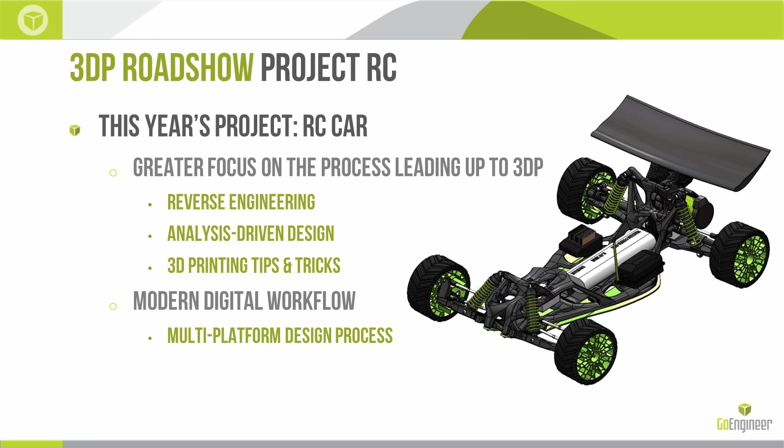All right, so here's the scenario for Project RC. GoEngineer is pivoting, and we are going to enter the RC market. This is the scenario here. We want to create aftermarket parts for existing RC car chassis. So I know at least one of you recognize that as being a Traxxas.

Anybody else here into RC cars? Yeah, I'm not either. I wasn't until I started this project. I was like, this is actually really cool. And I go to the hobby shop and they have indoor tracks and it's awesome. And I start thinking, oh man, I could really get into this. And then I remember that my wife already thinks I'm a child. And so if I start showing up with these at home, it's probably not going to go over very well.

One of the things that we want to do with our products is we want to make sure that they are all designed efficiently and smartly, and they're all optimized. There's a lot of thought behind our designs. We want them to look good, but we also want to be able to prove that we've put a lot of time and analysis and effort into creating quality parts. And so everything that we design is going to be based on this analysis-driven optimization, which is something we're going to talk about.

The initial product line is going to be low volume and customizable, so it's a perfect scenario for 3D printing. 3D printing is its most efficient at one single part, right? And as we start to scale up, 3D printing starts to lose its efficiency. So at least as initial release, what we wanted to do was create a car like this that we could bring into a focus group or put in front of prospective customers and say, this is what we're capable of doing. This is how we design this. This is the thought process that goes into our parts.

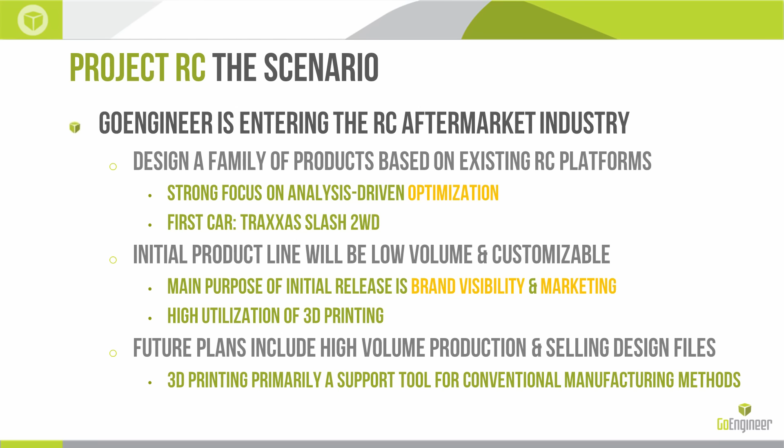When I'm printing parts, I have to ask myself, what's the end goal of the print? Is it going to be a prototype? Is it a prototype of a part that I'm eventually going to injection mold, or eventually going to cast? Then I have to design for the cast version or the injection molded version, right? But if the end goal is a 3D printed part, then I can design for 3D printing. And the design for manufacture rules for 3D printing are a lot different than the design for manufacture rules for injection molding. Does that make sense?

So the car that we based it off was a Traxxas Slash. We based it off Traxxas because basically they're the leader in RC cars as far as my little bit of research found. And so we wanted to pick somebody that already had an established market that we could poach. We could build our aftermarket parts on this.

It felt really nice to go into the hobby shop and say, what's your most popular car? I'm going to buy it. And they said, what's your price range? And I said, I'm not paying for it, so what's your most popular car? And the thing ended up costing about $400. And I didn't even have to get that one. The $400 one had upgraded motors and stuff like that. It isn't even important, but I have to buy the best, right?

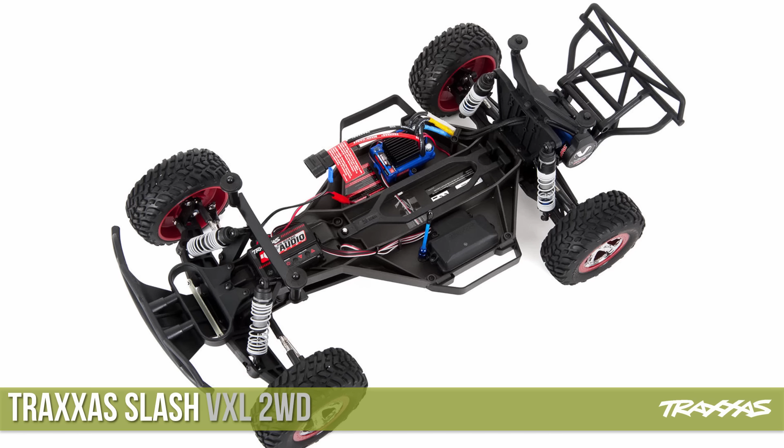Here it is underneath the shell. And this is what we're going to be reverse engineering and building our aftermarket parts for. All right, so it's actually a really good design, and it's optimized for injection molding. And you can see the chassis of the car that we purchased here.

So what's the workflow going to look like? We're first going to reverse engineer this existing platform. You guys are probably going to start to have some questions at this point because you don't really know the end goal, you don't know the process. So if you do have questions, you can ask them. We're going to reverse engineer the existing platform. The whole idea of reverse engineering is we just need to create a digital model of something that is already three-dimensional reality, a digital model that we can use as a guide to design new parts off.

Once we have those parts digitized and we can start doing our own designs, we need to go to our analysis-driven design step. And you'll see how this works. And to be honest, this is going to be my favorite part to talk about. And I'm guessing that there's nobody in this room that has ever done this analysis-driven design before, the way we're showing it. It's really nice to be presenting to a group of people and knowing that I have something that probably nobody in here has seen before. There's going to be something new for everybody in this room, I promise.

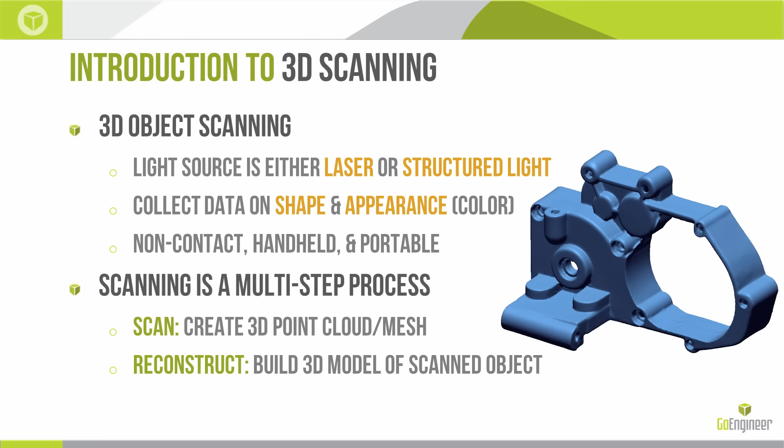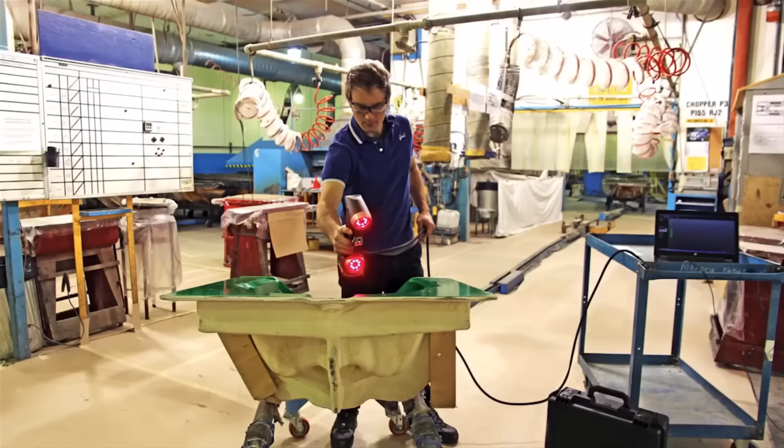So you scan it and that will create a mesh, and then normally you're going to be reconstructing the model. So here's an image of our scan. I normally just wouldn't print or manufacture that directly. Normally what I would do is use the scan and use the software to recreate a parametric CAD file off that. So you can see it does have targets or stickers on the model. That's how these scanners register.

How are the stickers picked, the location picked? Is that arbitrary? It's arbitrary. They say about every 4 inches or so.

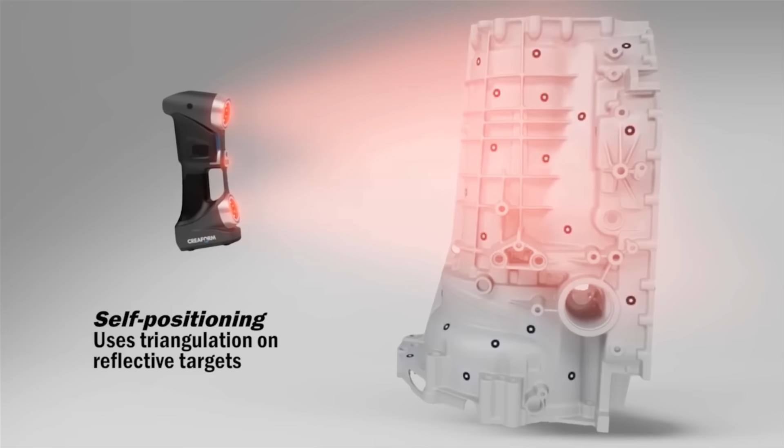So you can see in real time how quickly he's collecting that data. At any point, he can pause that for whatever reason and continue on later. Because he has those targets, he could actually move that transmission housing at any point as well. So he could actually hold it, if he's strong enough, in his hand, move it, and do the outside and the inside of that casing all in one scan. I'll let Cameron answer that after the video.

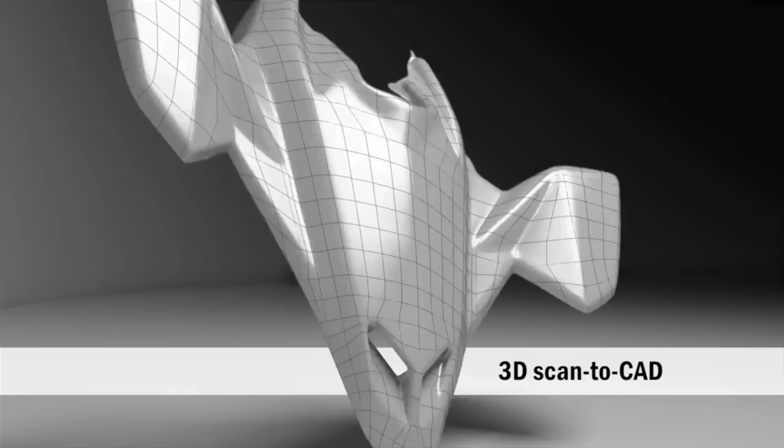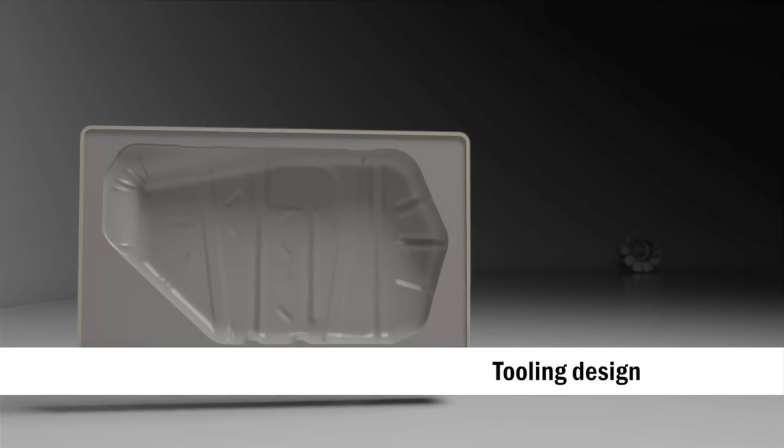Does it stitch? So if you go over an area and you inadvertently, because of the angle that you moved it, left the patch out, and you do a repass, does it know just to patch that area that it missed? It will continue collecting data over the stuff that it's already collected. But yeah, if you are scanning and you pause it and you start maneuvering the model and you see areas that you missed, you can start it right back up and continue scanning and hit those spots that you missed. You don't have to rescan it and then mesh those later. Does that answer your question?

All right, so there's a few different 3D scanning workflows. Scan to print is the most basic. This is where you might scan a part and then manufacture that or print it as is. So this is used pretty often for things like artifacts. We've done dinosaur bones, handcrafted models that don't have any digital files that exist.

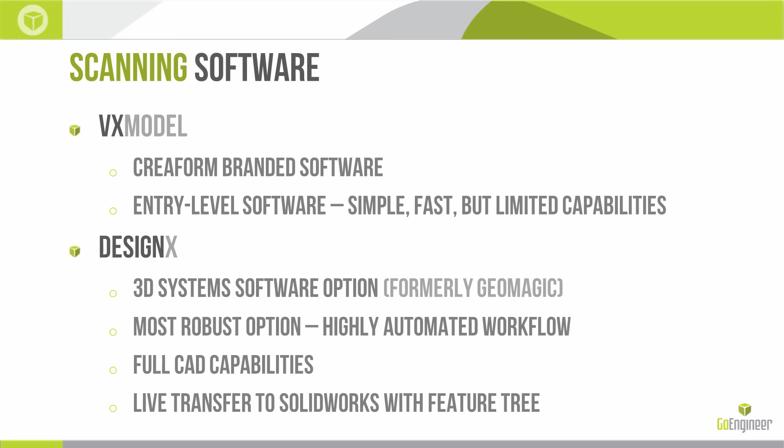We do offer two types of software. I wanted to just quickly discuss this. We have a VXmodel software, which is more entry level. It's Creaform branded. And then we have a software called Design X, which is what I use. It's the higher end software. It's a little bit more robust, probably a lot more robust, pretty automated workflow. It does have full CAD capabilities, so it is a full CAD tool.

I didn't really use it that way because I'm well versed in SOLIDWORKS, and it doesn't have the same capabilities as SOLIDWORKS does. And for that reason, it has a live transfer to SOLIDWORKS and a lot of other CAD tools as well. So you start to build some basic shapes in Design X, and then you hit transfer, and it will transfer over to Inventor or SOLIDWORKS or Creo, I think, Pro E, and it will build a feature tree for you that's editable.

So are you actually using these meshes as a template to draw over the top of these things? Yep, exactly. And you'll see a screenshot later on, but that's exactly what I'm doing. So I have a template, and you'll see how I'm actually using them. So there's no scanner software to create vector. Usually it's always a mesh. These softwares always turn these scans into a mesh.

It's a mesh. Within Design X, there is like an auto surfacing tool where it will auto surface that mesh, but for my purposes, it wasn't what I wanted. But for some other purposes, it could be exactly what you wanted. Yeah, because it wasn't accurate enough? Yeah, I wanted very prismatic shapes in very definite shapes that are tightly controlled. Whereas when you do the auto surface, there's not a lot of control over it.

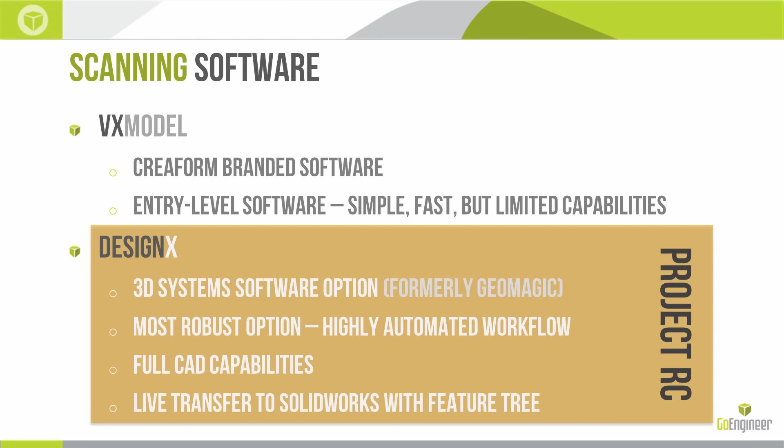Do you agree with that, David? Yeah, normally auto surfacing is usually for very organic shapes that you couldn't draw otherwise. Unlike this comment about the prismatic, he wanted to have features in the tree that you could edit. Yeah. I wanted flat surfaces that are straight and square and whatnot.

All right, so let's get into the process here. As we're going through this process of recreating this chassis, I want you guys to notice in the bottom right-hand corner, I have a little logo, and that logo is a signal as to what piece of software I was actually using. So this is the Design X logo, and you'll see SOLIDWORKS, you'll see Stratasys, you'll see Inspire as well.

So to reverse engineer this chassis, which is the first part that we wanted to do, instead of putting stickers on the chassis and doing one single scan, we actually put this on a little turntable that we have, and that turntable has the stickers on it. So we didn't have to put any stickers on this. And we scan it, and then because it is on the turntable, you have to do multiple scans.

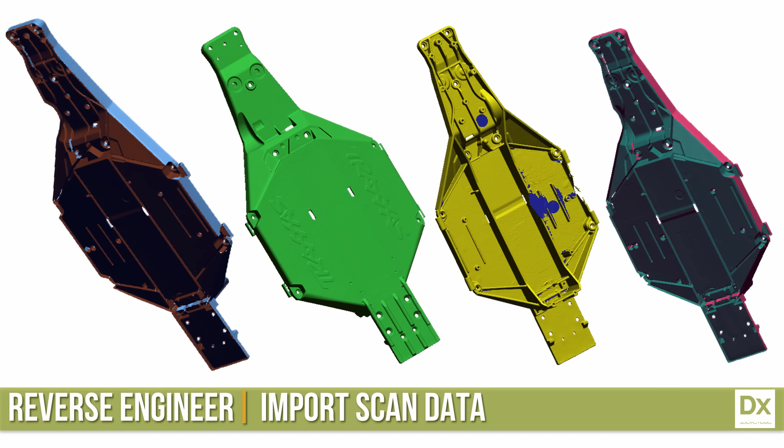So you scan as much as you can, you stop it, you flip it, you scan it again, you stop it, and you end up with, in this case, 4 different files. So these are 4 different scans. They all have a little bit different data based on how the part was oriented.

We combine those scans using the DesignX software. We realign them into a single scan, and then we remesh it globally. This process takes about 3 to 4 minutes. It's pretty easy. It basically says, here's your scans. Which two do you want to move? Pick corresponding points on each one. And it does like a coarse align, and then it does an automated, more accurate align, and then it just remeshes it all as one.

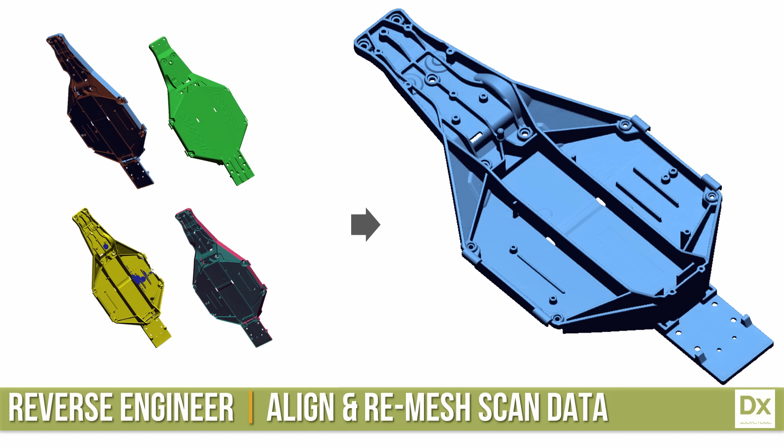And so actually what happens is you get a result that's basically a combination of 4 scans. And it's probably hard for you guys to see in the back here, but this scan is so accurate that you can start to see some of the sticker data on this. So this is a sticker that's raised just slightly. You can actually see it up on the bottom of there. So it's a quite accurate model.

We ended up doing this for every single part in the car. So this particular chassis has a few parts that are already bolted together. We scanned every part individually because we felt like it gave us more flexibility in what we wanted to do. Like if I only wanted to recreate the shock tower, I could do that if I had it as a separate file. So we scanned them all individually. All of these 7 parts are actually what I call the chassis.

So the chassis has all of the mounting points. So you have like control arm mounting points here, shock tower mounting points here. You have steering servos and steering bosses here, front bumper and front control arms, front shock towers. All of those mounting points, that's what I'm after. Because I know later on that I wanted to create something like this. I wanted to create a single part chassis. Okay? Are you guys following along?

You're confusing me with the term sticker. Like these guys here. You peel it off and put it on your part. Those are all known things. The scanner knows what they are, so it knows how to treat those. Yeah. The turntable you said had the stickers.

Yes. Is there any relationship between the turntable and the part? If you're doing the other parts, or you're doing multiple scans of your base chassis, that doesn't have to be aligned again. You just set it down on it. Correct. So it's totally independent of each other.

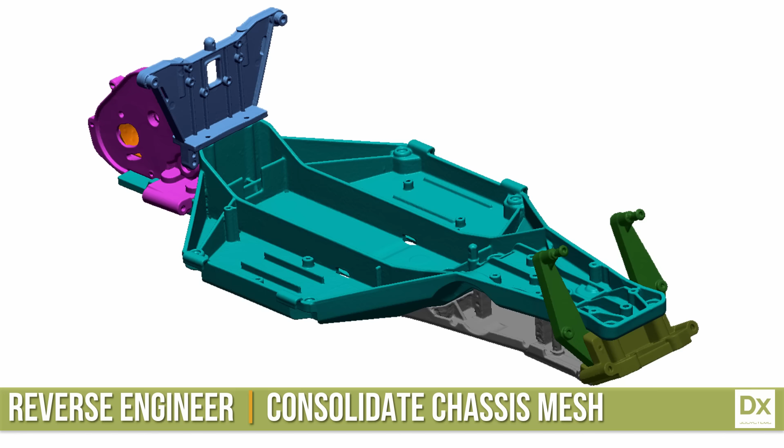Are the stickers dumb? I mean, they're just a reflection point from the tool, so they're not any particular identifier in the sticker itself. Correct. It's just a relationship to the other stickers. They have to be this particular sticker so that when the camera sees it on the scanner, it knows that it's looking at a sticker. But other than that, that's it.

Okay. So I took all of those scans and I aligned them within the DesignX software, and then I started rebuilding some geometry. All right, so these are the points that I started rebuilding. Notice I didn't rebuild the whole car. All I wanted was the mounting points, because this is what I'm going to feed into the next step, which is the SolidThinking Inspire software, the topology optimization software. All right, so all I needed was all of these critical points here.

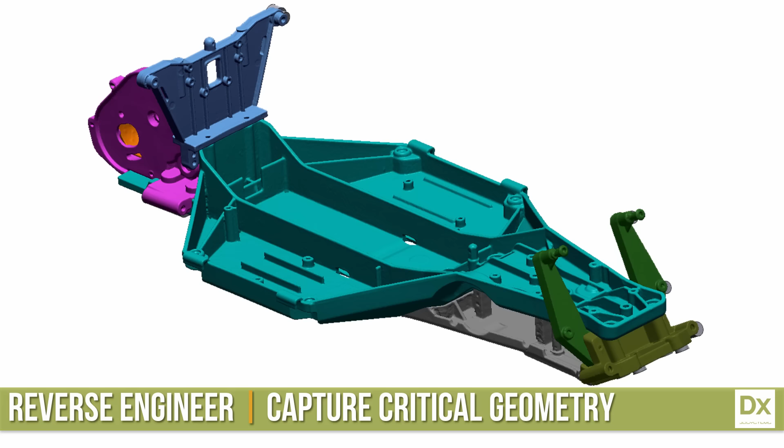I could rebuild entire parts, and I did that on some cases, but in this particular case, just the mounting points. And that gets us past the reverse engineering stage and into the design and analysis stage. So let's quickly show you guys a quick video here.

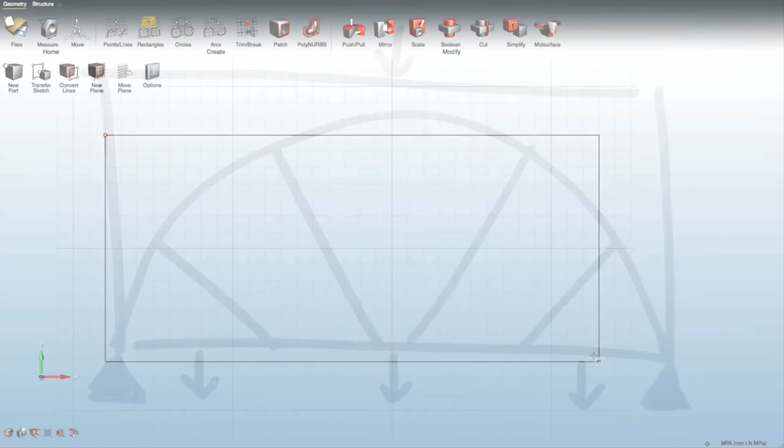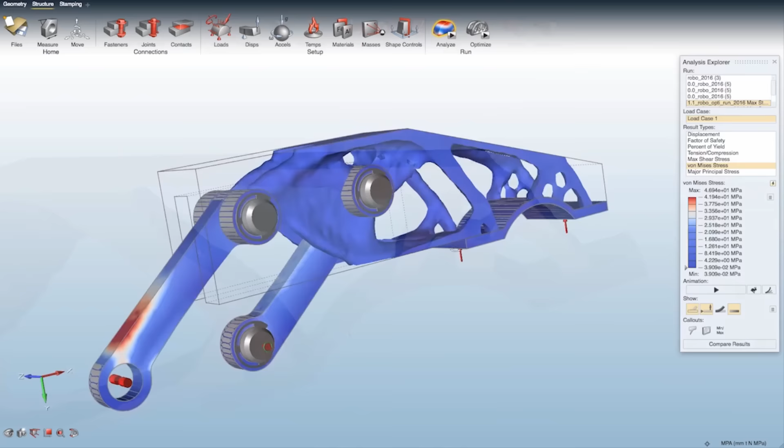Where do your designs begin? Do you use previous projects as a starting point? Can they be based on hard-earned knowledge, or is it something else? When faced with a straightforward problem, like a beam carrying a single load, creating an efficient structure is something that can be done with, let's call it our engineering intuition. Or the same arrangement can be drawn here with all the simplicity of a sketch, and optimization algorithms generate basically the same elegant solution. But what if we tackle something more complex, like an assembly with multiple loads applied in 3 dimensions? For most, engineering intuition is not enough anymore, and conventional simulation tools won't help. SolidThinking Inspire changes the way design engineers approach design by generating forms based on a set of loading conditions. The results can be validated and compared using native analysis tools. Final models can be easily exported to your preferred CAD tool for finishing, or you can use the cutting-edge PolyNURBS toolset to prepare the model for additive manufacturing. Inspire can help every design engineer quickly create dramatically lighter structures and better understand the effects of material placement in whatever they're developing. New users need, at most, a few hours of training, and many require none at all. SolidThinking Inspire. Lighter, stronger parts without the learning curve.

So who's already sold on that? Right? That's pretty neat, don't you think? The last part that they talked about, it being a very accessible piece of software to get your hands on and start using, is absolutely true. So this project is the very first time that I've ever used Inspire. It's actually also the first time I used DesignX. So DesignX has a little bit steeper learning curve.

SolidThinking, very approachable. SolidThinking, it's a NURBS and Morphogenesis CAD software. So the Morphogenesis part is the optimization part. The video didn't show it very well, but we'll beat it to death later on. But basically, again, it creates this design envelope with critical surfaces. You impart loads on those surfaces, and then it does an FEA analysis and iteratively whittles down to the shape that you want. They call it morphogenesis.

Does anybody know what morphogenesis means? Where that term comes from? It's a medical term. It basically means bone growth. And so you can see that this software has been around for a long time. It was originally created by a research group looking to study how bones react to forces and how they might change shape based on external loads, and how they grow in response to external loads. And those algorithms that they developed were basically turned into mechanical CAD software because they thought, hey, we might be able to create optimal designs out of that.

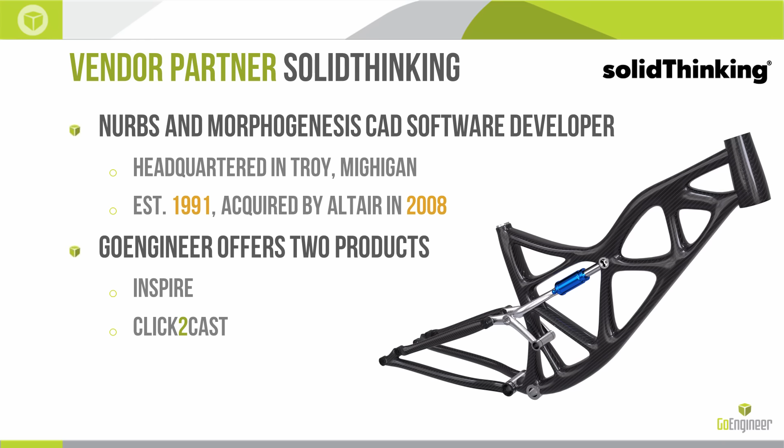So I can say, have free rein and give me an organic freeform shape, or I can say, give me a shape that has just straight zero draft, more like an extrusion, something I might want to machine. Or give me a result that has draft in a single direction, or give me a result that has draft in 2 directions. All right, so even if I'm not going to be 3D printing this, if I know I want to machine a bracket, I can tell it only give me results that might be machinable.

So a quick intro into what topology optimization is. I like to call it true design for additive manufacturing, because the most optimal results are typically impossible or difficult or not cost effective to create. The engineers define the boundary information and not the shape. So this is a fundamental difference in going back to our bracket, how we might approach the design.

In the old style, the engineer defines the boundary conditions and then creates an initial shape and starts doing some detailed drawings, does some FEA analysis, changes the results based on that. With this, all the engineer initially does is create the boundary conditions, set up an FEA study. The software then tells him, here's an optimal shape that you should go with.

And then it's the engineer's responsibility to take the information that the software tells it. All the software is doing is saying, here's the shape that you want. These are your load paths. You absolutely need material in these spots. You can add more material other places. And I don't care how you put the material there. I don't care if it's machined or cast or welded or 3D printed. Just put material here. Does that make sense? So it eliminates that first pass, that first guess.

Types of inputs that they're going to use are support faces, forces, pressures, RPMs, accelerations, both straight and circular accelerations, thermal loads as well. And really just keep in mind that the software is outputting the load path. So it's showing you, based on the resultant forces from all those load cases that you did, this is the result. These are the forces. These are the paths for the forces.

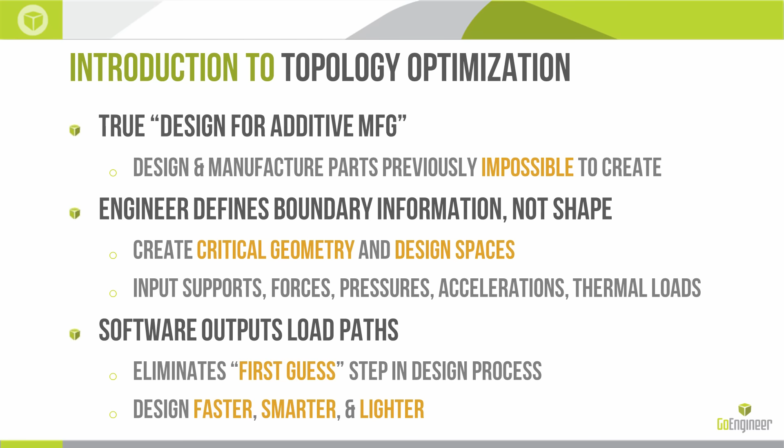Notice I use the word load case. That's pretty important. It allows you to set up, like in the example of our car, we did an acceleration load case, we did a decelerating load case, and we did a sharp turning load case. So all of those load cases have different forces, different accelerations, different pressures, stuff like that. It solves all three of them at the same time and gives you a result that's optimized for all three of the conditions. Okay.

Some of the characteristics that we can optimize for: max stiffness. We can target a particular mass if we need to hit a certain poundage. We can optimize around resonant frequencies, and we can optimize for wall thickness as well. And then keep in mind the shape controls that we have. You can go organic, you can do extrusion, or you can do the drafted ones. I know I mentioned that I looked at a lot of different pieces of software. This is one of the key reasons why I chose the Inspire software, because the other tools didn't have these shape controls.

And most people aren't printing end-use production parts right now, right? Everybody wants to. We're not quite there yet. We're still using prototypes. Prototypes are the main application for 3D printing, and then we go on to injection molding, we go on to machined parts. And if you don't have these shape controls, then all of these steps are kind of superfluous because it's giving you a result that you're not going to create out of 3D printing, right? So shape controls are super important.

All right, so now we're inside the Inspire software. What you're looking at, the gray areas came from the DesignX software. So from DesignX, I just output a Parasolid file and brought it into, in this case, SOLIDWORKS, and I created my design envelope inside SOLIDWORKS, which is the maroon color. So that's my bounding box. This is a piece of information that I have to feed it.

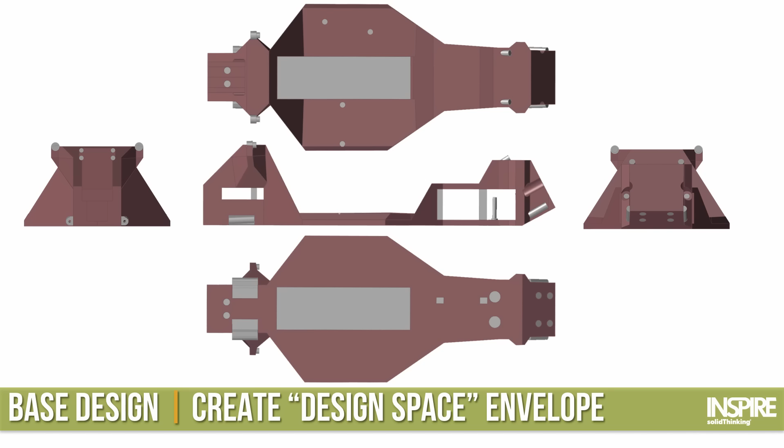This is probably more complex than it needs to be. In general, Inspire wants a very basic bounding box. It wants a lot of freedom, because I kind of built in some weaknesses within this, like not having any material right here created an inherent weakness in it, where if I had material within my bounding box, I'm sure it would have bridged that gap.

Some of the load cases I did, so acceleration, you can see some of the forces I input. There's an acceleration down here going this way. You have remote loads for where the wheels make contact, and remote loads for where the end links actually link up to the chassis. I will say these load cases will probably not hold up to a lot of scrutiny.

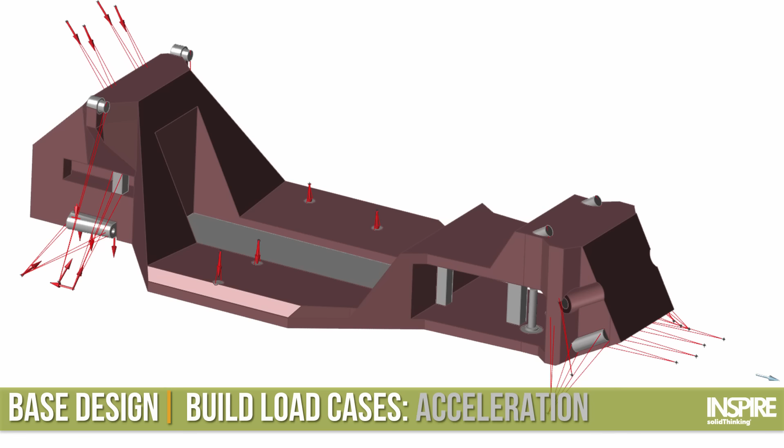So if you get these, you guys already have these slides. If you start looking at these and say, this doesn't quite make sense, it probably doesn't. But it brings up a good topic. The results that you get out of Inspire are only as good as the information that you feed it, right? Same with any standard FEA analysis. If you set up your analysis incomplete or incorrectly, you're going to get an incomplete or incorrect result. Same thing for Inspire. So definitely put a lot of work into making sure that your load cases are accurate.

We did a hard braking or decelerating. You can see a lot of forces on the front shocks or front wheels, a deceleration. One of the cool things, if you don't know the exact values, if you are optimizing for the max stiffness or the max rigidity, you only have to have relative values on your forces.

So in reality, what I did was, since I didn't have hard numbers, I sort of just guessed and said, okay, when it's decelerating, I might have a force of 1 pound on the rear wheels, but 5 pounds on the front wheels. The 1 and 5 aren't really accurate, but what I was going for is a force that's 5 times higher than the one on the rear, okay? And it's still going to give me the result that I want if I'm optimizing for max rigidity.

If I was targeting a mass, or if I was going around resonant frequencies, or if I really wanted good information out of my factor of safety plot or my displacement plot or stress plot, then I would have to have more accurate values. Does that make sense? Everybody following me? I probably shouldn't admit I did that, but I think it's a key thing to understand.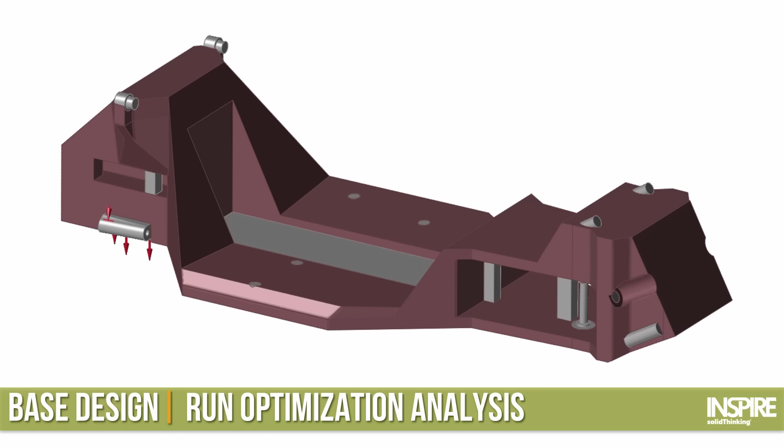And so you start to see the material whittle away. And what I'm looking for as I move the slider is, at what point do I see the minimum amount of information that I need to go on to the next step? So it's sort of up to my interpretation. Somewhere in the middle there, I saw enough load paths that I could say, okay, I have enough to actually design off of, okay?

And that's where I started using that PolyNURBS tool. So you guys got a kick out of that. When it started within that video, creating those swoopy shapes along the load paths, did you guys notice that? That's called direct editing, the push, pull. You can grab faces, edges, points, pull them, shrink them, expand them, add more for more control, delete them to make it more swoopy. That's built into Inspire, and it's awesome.

I've always been a mechanical CAD guy, so I haven't done a lot of this type of modeling, but I've seen it, and I've always wished that SOLIDWORKS would implement it. Now I finally have this tool. Because if I wanted to draw this shape in SOLIDWORKS, or Inventor, or CATIA, or Pro E, kill me, because it would be horrible, right? It's a different type of modeling.

And it took some getting used to, but, you know, again, this was my first project, and it came out pretty well. You've used Inspire. Do you have the PolyNURBS tool? It just came out in 2016. I haven't seen that. You wish it had it, right? Have you updated to 2016? No, I just used the trial. Oh, got it. But I got a lot done in the trial. Yeah, that's the way to do it. I'm pretty sure anybody can go on the website and get a trial.

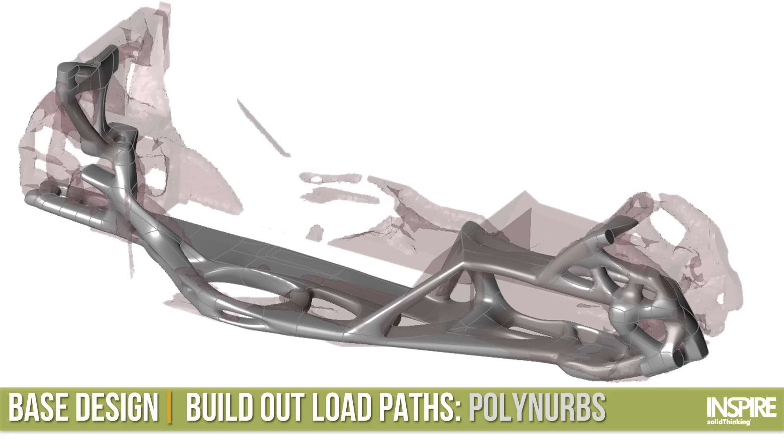This PolyNURBS tool is awesome. So what I did was, within Inspire, I drew half of it, okay? And then I brought it over into SOLIDWORKS, and I mirrored it. I combined those, and I started doing all my detail work in SOLIDWORKS, okay? So I needed to make this manufacturable. You know, I put these tapered holes in there to use these little brass threaded inserts. You guys notice those on the printed parts? It's a great way to get threads into a printed part. I added a few details, little artistic freedom there. But this is the end result.

All right, so the idea here is that when I drew this, I probably had a particular material in mind. I would know the strengths of those materials. I can also put that material in Inspire. And if I do the exact same studies, but one I set the material as like titanium, or one I set it up as, say, nylon, those load paths are going to be the exact same. They'll just be different diameters. Does that make sense?

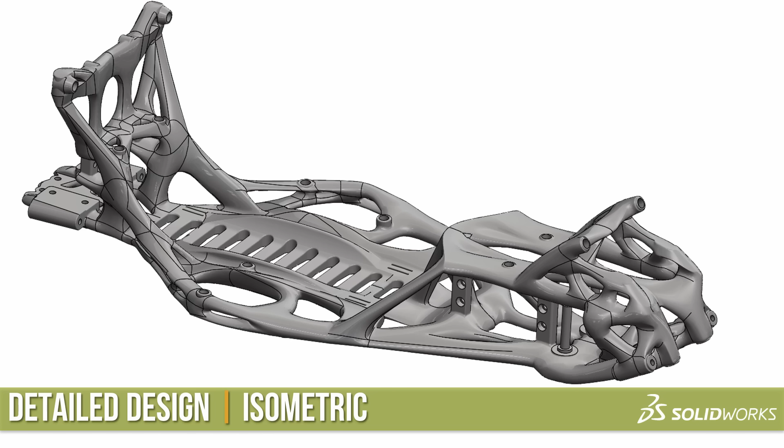How big of a range of materials can you choose from in the software? That is a good question. I noticed a couple dozen, and I'm quite sure that you can input your own, but I'm not 100% certain on that. Would you have to bring the strengths of the materials into the software? If you're creating your own, yeah, you go to like MatWeb and pull up just some basic stats on it, because it's not doing like a non-linear sort of FEA analysis.

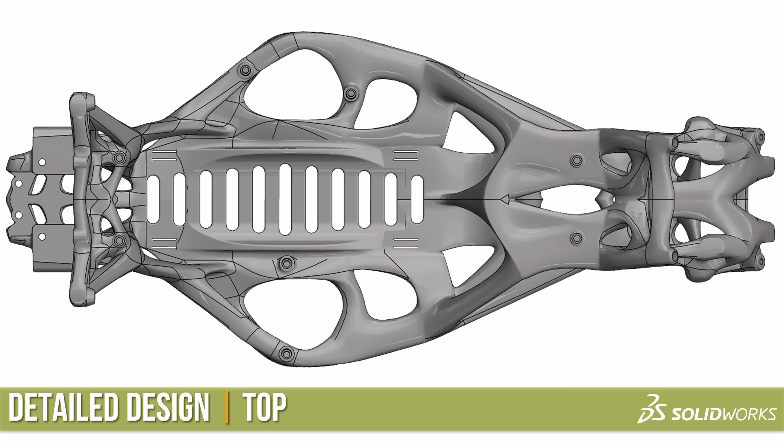This is not specific to any manufacturing process, right? This is not. Right, that's just sort of a general idealized frame. Exactly. Because I knew I was going to be printing this and I wasn't going to do anything beyond that. Because I'm basically using it for brand visibility, for marketing. It's a showpiece, so I'm just going to print it.

You are impressing me with a lot of information. Thank you. I appreciate that.

But if you had in mind, well, we're going to die cast this, would the results be different? The results would have been different because I would have put a shape control on it that was like a double draw shape control. So it's going to be drafted in two directions, whatever I do. And so the result would be different. I will say, because this single part is such a complex part, the results might not be what you want. I will say Inspire is definitely geared towards more simplified parts, I learned, because this is a very complex part.

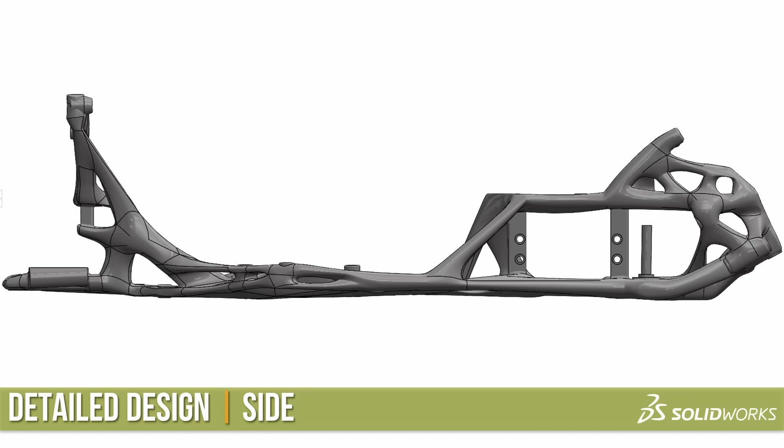We had like 20 different mounting points, all in sorts of weird configurations. That part's going to be hard to manufacture no matter how you're doing it, right? And so what you'll see is the results for some of the other parts that I did, like the control arms and stuff like that, much cleaner results that would be more optimized for something like die casting.

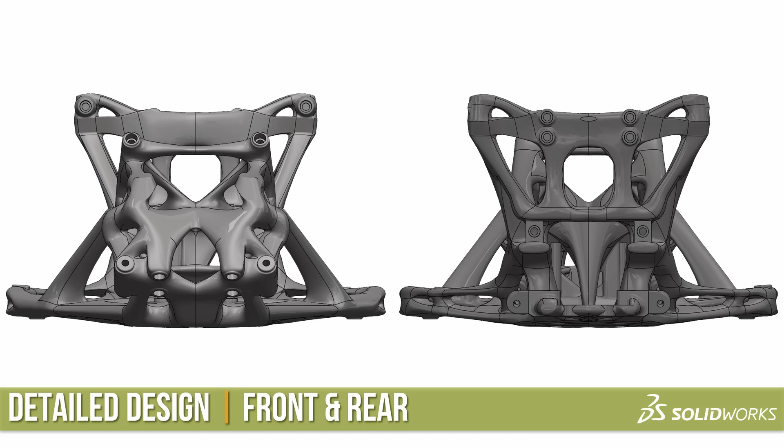Yeah. So if you choose, say, the double draw for injection molding, does this also include a simple mold flow analysis on it? It doesn't. Okay. It doesn't. And that brings up a good point. Now that I've drawn this and I have it in SOLIDWORKS, so it's all parametric modeling stuff, ideally I would set up another FEA study, a second pass FEA study, and verify my results. Okay? That would be the ideal situation. Because that Inspire FEA, it's a good FEA analysis, but it's not as robust as SOLIDWORKS or some of the other tools, and it definitely won't do mold flow or anything like that.

All right, so now it came time to start prototyping this. We use the Stratasys machines. Between all the vendors that we talked about today, I think Stratasys is the one that you guys are most familiar with.

There's your 1989, Tom. I could have got a water bottle out of that. That's cheating. I know, right? He probably stole it from me.

All right, so one thing I did want to mention, because I just learned this fairly recently, is that last year in 2015, amongst all of the commercial 3D printing manufacturers, Stratasys sold over 50% of the machines that were sold globally. So they're the #1 machine manufacturer on the commercial level. And us at GoEngineer, in 2014, we were their #1 reseller. Last year, we got bumped by a reseller on the East Coast, so we were #2

last year globally, but we're still #1 in maintenance renewals, which I'm pretty proud of because it tells you that Stratasys is in a lot of different industries. They work with a lot of different customers using their machines for a lot of different applications, and we're right at the forefront of that.

I'm very lucky to have the job that I do because I get to learn from people like you that come with all different backgrounds. Some of you might be working on assembly plants. Some of you might be creating toys. Some of you guys might be creating jewelry and artistic stuff. And I learned from all of you, so I love it.

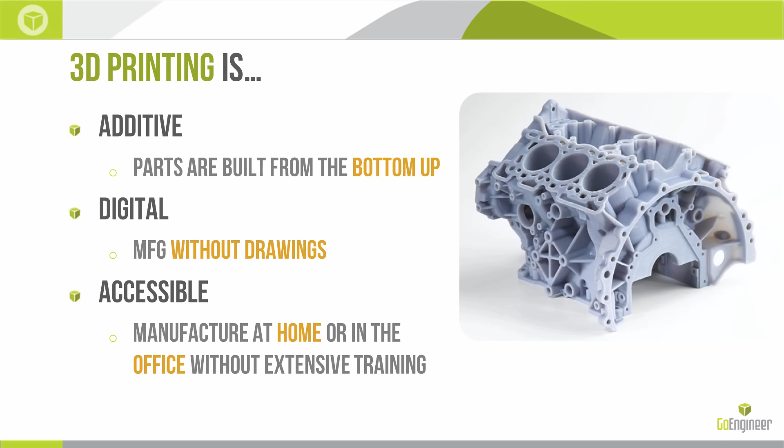At its most basic, 3D printing is an additive manufacturing technology, as opposed to something like machining, which is subtractive. Okay, so in a subtractive situation, you're going to start with a block of material, and you're going to use tools of various shapes and sizes and materials to whittle down into your end shape. And that limits you in the types of parts that you can create. It limits you in the flexibility of your designs because you have to work around setups, work holding, tool accessibility, other typical design for manufacture rules.

Whereas with additive, what's that? Lunch. What's that? You have to work around the break. Oh, yeah. In America, we don't have lunch breaks. Yeah.

No, you do have to work around lunch, and 3D printing is great for that because 3D printing is like a lights out manufacturing tool. You hit the button, it goes, you go do something else. We keep these machines running 24/7. Most CNC machine shops do not do that without a person at the machine, an operator that's in charge of loading the materials, doing their precise setups, unloading the materials, adjusting the feed rate as that machine's going, listening to it. We don't do that.

We hit go. I time it. Personally, I time it where I get in the morning, I unload the night before parts. I hit go. I try to print enough parts to get me to the end of the day. It stops. I unload it. I load up more parts that gets me through the night, and it just goes. And then comes the weekend. I get to do my big parts. I get a 3-day weekend. I get to do the bigger parts that are usually toys and stuff like that. So we keep these going.

There's no drawings. It's all digital. We go straight from the CAD file. And it's super accessible. This is one of the best things about 3D printing, and it's one of the reasons why it's exploded over the past 5 years, is anybody in this room can become a manufacturer with a 3D printer. Everybody. With a little bit of investment in machinery, not really any investment, depending on your machine, into where you're going to put the machine and all of the supplemental equipment that you might need. It's all very minimal. Anybody could be manufacturing parts.

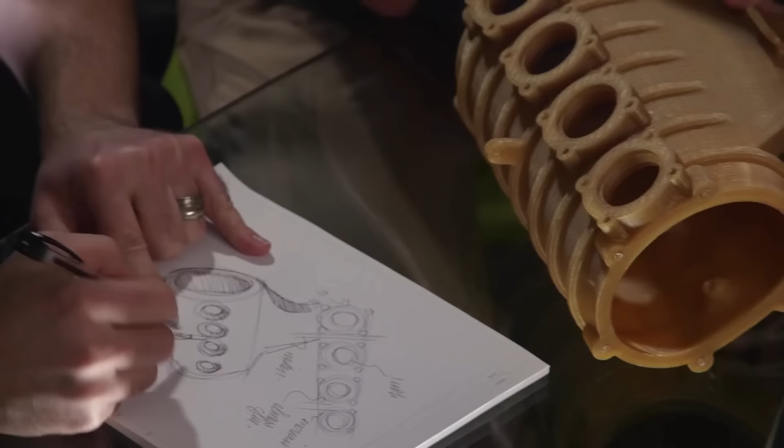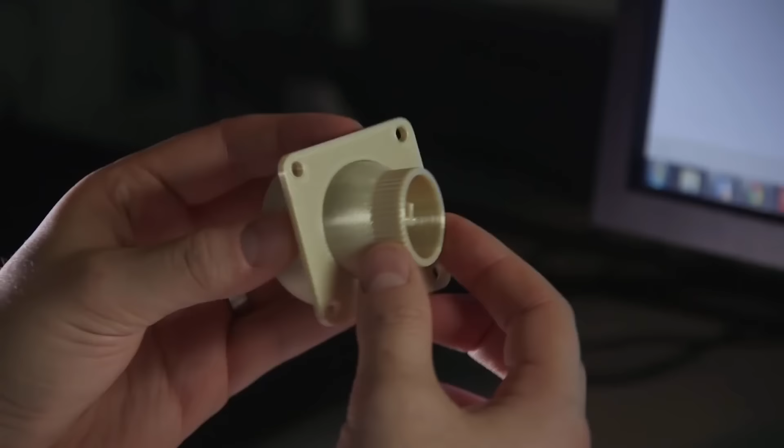With FDM, a designer can sketch an idea and test it the same day. Industries can cut lead times and costs. Products turn out better and get to market faster. FDM parts are helping to build the cars you drive. They're in the airplanes you fly in. They're in the medical devices that save lives. FDM is cutting waste in manufacturing. It's helping engineers power remote villages in Africa. It's helping farmers feed an ever-expanding population. And the ideas keep coming.

Doesn't that video just get you pumped up? He's so excited. It makes me very nervous. He makes you nervous? All right.

No, we spend millions of dollars developing products, and you have a device there that someone can copy my product instantly. That's true. That's true. And that's why we have copyright and patent and intellectual property laws.

Are you saying that the machine that printed the chassis, it was a single filament machine, no support material required? It has a single model filament and a single support filament. You'll see in pictures there is support material. If there wasn't support material, I would have had to probably change my design a little bit.

When they took over MakerBot, did the line that MakerBot was producing change much? Did they sort of blend the two companies, maybe one lower end as opposed to the other, or do they still function quite separately? Quite separately. So Stratasys actually has a few different segments.

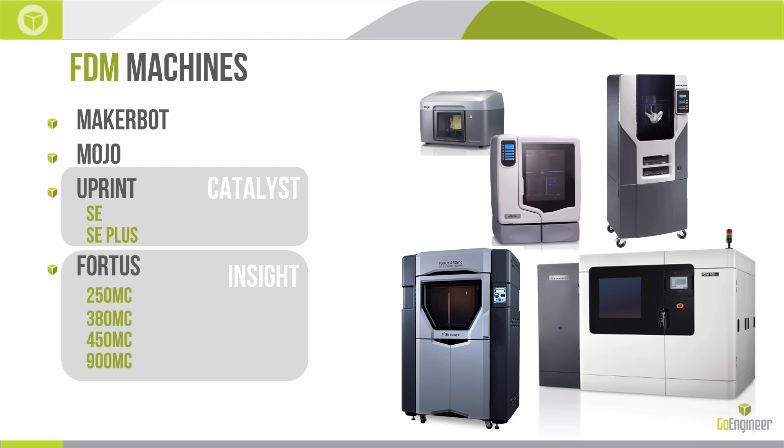Most of the parts that you see on here, I printed on this Fortus 250 or the Fortus 450. I'm not going to go into the details on the machines, but just know that there's pretty much a machine at every price point that you can imagine. So what you're looking at here is a glimpse of inside the printing software.

When I go to print a part on FDM, I have to choose a material and choose something called a slice height, which is the Z layer resolution. I also have to choose an orientation. And with FDM, orientation is probably one of the most important decisions that you have to make. When I printed this, I actually printed it upright on its side like this. Anybody want to guess why I might have chosen that orientation as opposed to like this or like this?

Yeah, so that's a pretty good indicator. So I knew it was weak, like bending like this, right? And so what I wanted to do was I didn't want to impart a force that would cause it to shear along the Z axis. Okay, so with FDM, you essentially have parts with thousands of Z shear layers.

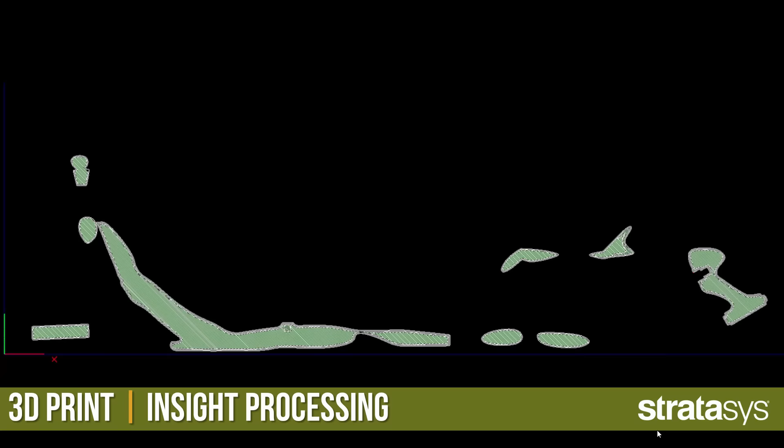How much weaker is the Z axis compared to the X and Y? It depends on the material. It could be as little as 10% to 25%. Nylon is going to be the most isotropic, and then the other ones are pretty much the same. But nylon, for some reason, is a little bit more uniform.

And then any other reasons why I might have done it on its side? Because if I printed it standing like this, I would still get the Z layers that I want. I think it took a little bit longer. Your Z-axis is usually your worst tolerance level. That's true. It would tend to distort those features a little more. That's true. That didn't come to mind in this particular case, but you're absolutely right.

So in Z, because I printed this at 10 thousandths slice height, my Z layer goes in increments of 10 thousandths. Whereas in XY on the machine that I printed on, it's plus or minus 5 thousandths. So it's more accurate in X and Y. Aesthetics was really the reason. It looks better standing up.

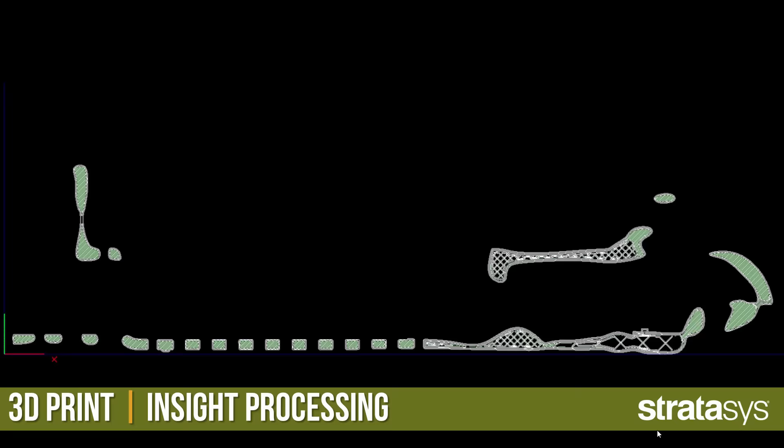So with FDM, because you have these discrete steps, as your walls shallow out, those steps become more pronounced or more visible. So you really want as many vertical walls as possible. And that's why I chose it this way, because I have lots of vertical walls as opposed to flat, where this bottom is very shallowly rounded. Does that make sense? So it just creates a better looking part.

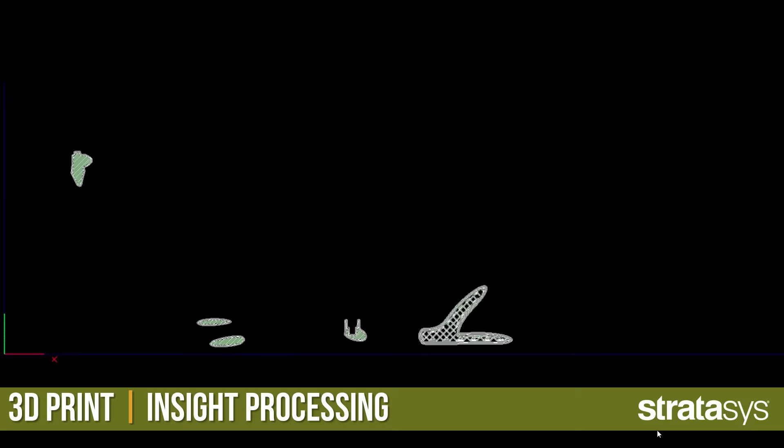See this? How many hours? Oh, that's about an 18-hour build. So, you know, it's 18 hours. I started it one day and I had it the next day.

On the bottom plane, they generally have a heated platform because of, is it temperature distortion of the material? Yep. So all of the Stratasys machines are basically ovens. They're all enclosed, and they're all very tightly temperature controlled. And on the larger machines, they have very tightly controlled airflow as well.

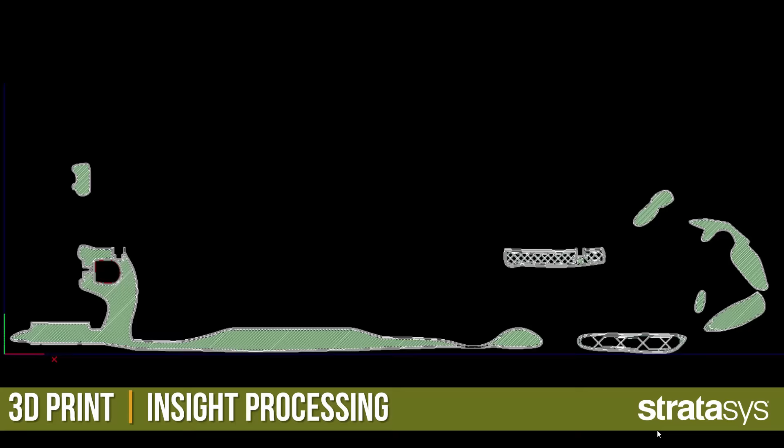Because what you don't want is your part cooling at different rates, because it's going to start to warp and have dimensional issues. So everything's very tightly temperature controlled in these machines. So I was wondering if that came into effect of also standing it up on edge as opposed to the bottom layer. It shouldn't. There shouldn't be a temperature gradient in the different Z layers, because they have fans and air circulating and whatnot.

I didn't have to worry about creating uniform walls because one thing I knew I was going to do is print the interior sparse. So you can see the density of the print actually changes as it goes up. You have a solid, a semi-sparse, and a sparse area. That helps on weight. It also helps on material usage.

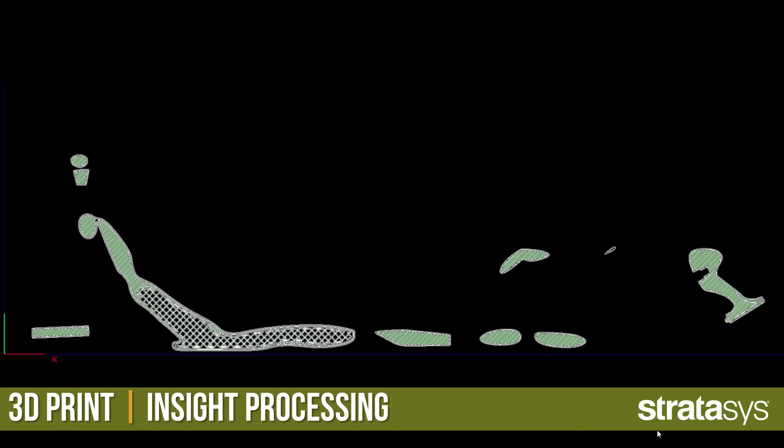What's really neat is if you look at Local Motors, what they're doing with their car bodies is hollowing them out now to meet crash tests. Because otherwise, with the first ones they printed, you slam it in the wall and it'll be like a '57 Chevy. It's not going to move. Really? So now they're making crumple zones within the structure, just like we're showing here. That's very cool.

Yeah, so this is just a click. This is drawn solid in the model, and it's just one click. I don't have a lot of control over the interior shape, but there have been prints where I've actually modeled a surface and done interior portions as well. And that's probably what they're doing, where it's a more structured interior.

Totally possible. Here's another screenshot from that software, and this is the support material you were asking about, all the gray. This is the software within a uPrint or a Fortus? Yeah. This is called Insight, because I use the Fortus machines. The uPrint uses Catalyst. And Catalyst doesn't have as many options as Insight does. For this particular part, I didn't do anything special, but in a later part, I needed Insight to do some of the stuff.

Yeah, you can do like hexagonal patterns. You can do some other stuff. I wanted to show this because here it is standing upright. 3D printing, I've told you it allows you to print pretty much every shape that you could imagine. So what does it do when it needs to print like an overhang or an internal cavity?

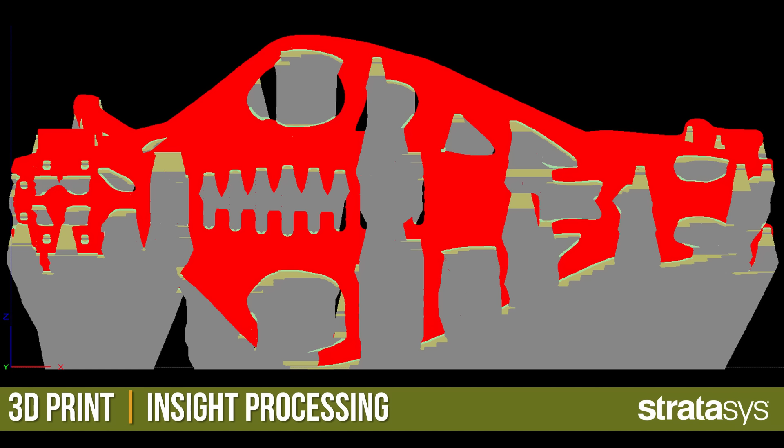The software sees those unsupported surfaces and creates something called support material, and it prints that out of a different material. So the reason why it needs to be there, if I go to print this guy and there's nothing there to lay it down on, it's just going to fall, right? So very critical component to have.

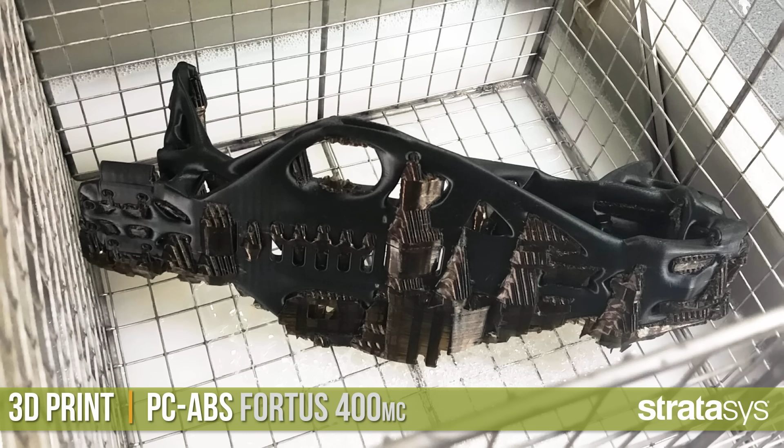Here's a picture from inside the machine of that chassis that you're holding. There's your black. That's a PC ABS, polycarbonate ABS blend. And then the support material is like this root beer colored material. This is water soluble. So after I take it off the machine, I'll usually break off as much as I can. And then I'll put it in an ultrasonic bath that we have.

The ultrasonic bath is just a mild sodium hydroxide mix, water that's heated, and it dissolves that away in a couple hours. So it's very hands-off, but it does take a little bit of time. All right, so that's the story of the chassis. Did you guys catch every one of those steps? The reverse engineering, the design or analysis-driven design, the detailed design, and the prototyping.

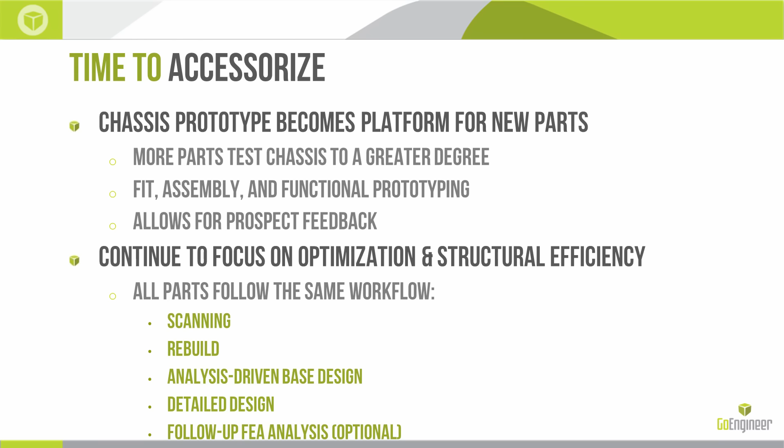So now I actually wanted to use this as a prototype. It's durable enough that I should be able to print more parts or hook up more parts and actually drive it around. So it's time to accessorize. We're going to start doing some other parts. Every single one of these parts is going to follow this same workflow, so I'm not going to go into as much detail.

I started with the control arms. We did the same thing. We took 3 different scans, combined them, remeshed them. These different colors, this is also in DesignX. What you do is you say auto region this, and DesignX looks at the mesh and it identifies things like planes, cylinders, cones, revolves, sections, and it allows you to interact with those.

So when it came time to actually redraw my geometry, I can say I want to draw a sketch and I want to sketch it on the plane that's red. And then it allows me to start sketching on that. You'll see a screenshot later, but essentially it takes a plane and puts it down somewhere in the model, wherever you tell it, and it picks up the silhouette of the mesh at that point, and then you use that silhouette to redraw your own sketch entities.

I wanted to modify these a bit. I wanted to give it a little bit wider stance. So once I came into SOLIDWORKS, I moved one of those mounting surfaces, and then I built my design space. I made it as basic as possible. Then it gets loaded up into Inspire. I did my 3 different load cases: basically acceleration, deceleration, and turning. Different torques, different forces on the shock mounting spots.

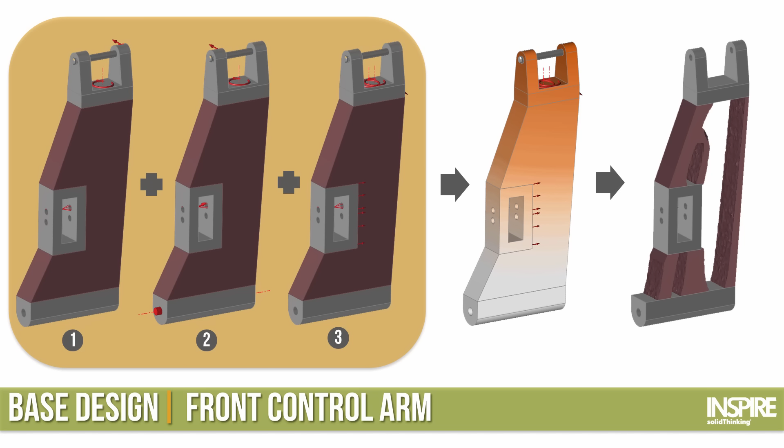I do my FEA analysis, and then I do my shape analysis. This particular analysis I did in extrusion shape control, and so that's why everything's pretty much straight down. Okay? So this is, I shouldn't say ideal shape, it's the most efficient shape based on my load parameters. Then it comes time to use that shape recommendation to draw my own parts. I did 2 versions. I did an organic version with the PolyNURBS tool, so that's the center here.

Notice I added a member. Anybody want to guess why I did that? Yeah. Well, kind of. It didn't look right. Like intuitively, it didn't look right, you know? And so this is another thing that I wanted to mention, and this is something that anybody who uses this software is going to have to battle with, is sort of trusting the results.

How accurate were the load cases that I input? I just wasn't really sure of it, and it gave me something that looked unintuitive. So on one hand, there's no harm in me adding a little bit more material. Maybe it's a little bit less efficient. In reality, if I had a little bit more time, I would create a version with it and without it and test both of them, all right? Or just continue on with the suggested, and then when I get to my follow-up FEA analysis, maybe I'll find something out there. Okay?

But I think you guys all understand, this software is maybe going to give you some stuff that's unintuitive, and at a certain point, you just have to trust it. It's probably going to take some experience with it, knowing what sort of results it gives you and knowing how well you set up these load cases before you start trusting it completely.

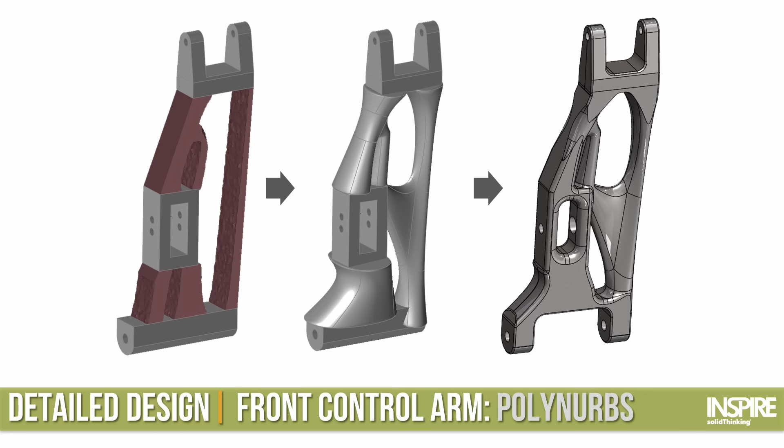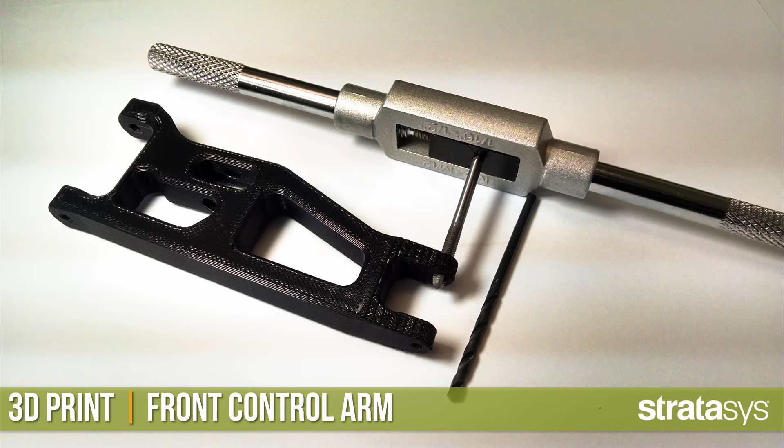So I did my PolyNURBS, and then I took it into SOLIDWORKS and did the detailed design. I also created a machined version as well. Then I printed those guys out. I think I just printed this out of, I think it's still PC ABS. I didn't have enough space to use the threaded inserts, so I just strictly threaded the plastic.

Another thing that I did, where I figured out that these were probably the weakest spots, because of how thin that material is right there. With FDM and with any 3D printed material that's going to react to a solvent, this is a little trick to make it a little bit stronger in small things like that. You use something called plastic weld. It's just a solvent cement.

It's very, very thin. You can paint it on there and it gets sucked down into the part. Just capillary action sucks it down in there, and it helps solidify that part a little bit more, makes it a little bit stronger. So nice little trick there.

I did the rear control arms. You can see the scan. I did an organic version. This one I did follow very closely with what it recommended. And then on the machined version, I didn't.

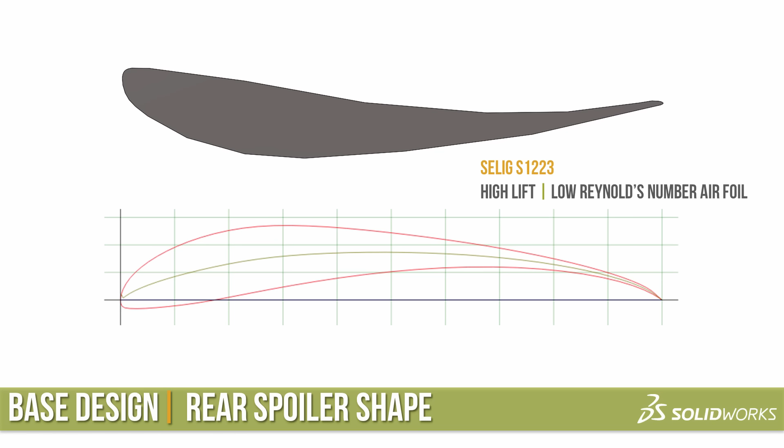I wanted to do a rear spoiler. And so to come up with this initial shape, I just found an off-the-shelf airfoil shape, flipped it upside down. I wanted to give it a little bit of curve, and there's not a lot of SOLIDWORKS users in here. But I wanted to show this slide because I used a tool within SOLIDWORKS that is not very often used. It's called the Flex tool.

And what it allowed me to do is I wanted this airfoil to be curved. In most CAD tools, if I wanted that curved profile, I'd have to do sketches and then do a loft between those sketches. What the Flex tool allows you to do is just draw it straight and then flex it or bend it. It also allows me to twist it and do all sorts of stuff. I don't have quite as precise control over the shape as I would with a loft, but in some situations, it's exactly what you want.

What file format and what does your design tree look like when you have that in SOLIDWORKS? This particular file? Any of them. Okay, so going back to the chassis, from DesignX, I saved out a Parasolid file. Parasolid is just a generic file that's pretty universally used on any software that uses the Parasolid kernel. Another option would be a STEP file, would be my second option. That goes into Inspire. From Inspire, I also saved out a Parasolid file. I brought it into SOLIDWORKS. So the very first feature on, say, the chassis was an imported body.

All right. That's like a dumb brick. The initial dumb shape is. Yep. So you're losing the parametric version of that. You have no design tree? No, I do have a design tree. And in fact, my design tree for this guy was like 400 features. Because maybe I'm a bad designer. But that initial shape was dumb.

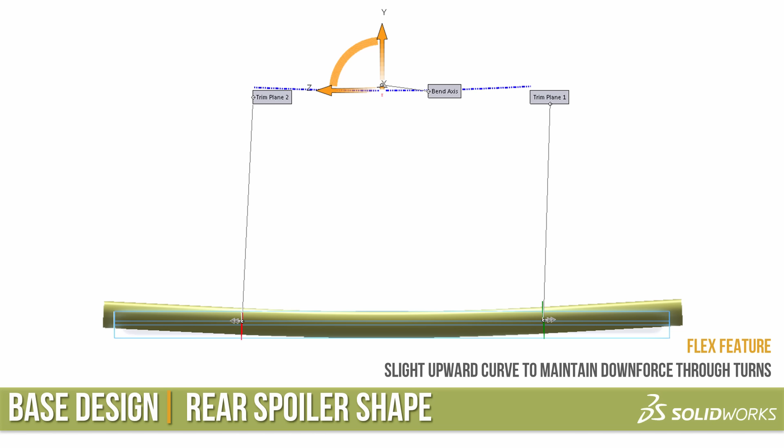So the only thing I had to redo was a couple tapered holes that I had done. So not the most elegant, but again, this is a lot more complex than most parts, okay? So if you're using it more as it's intended, with brackets and other shapes that are a little bit simpler, or more straightforward, you're not going to have as much of an issue. Does that make sense? I wish it ran inside SOLIDWORKS, but it doesn't, because it's using a totally different technology.

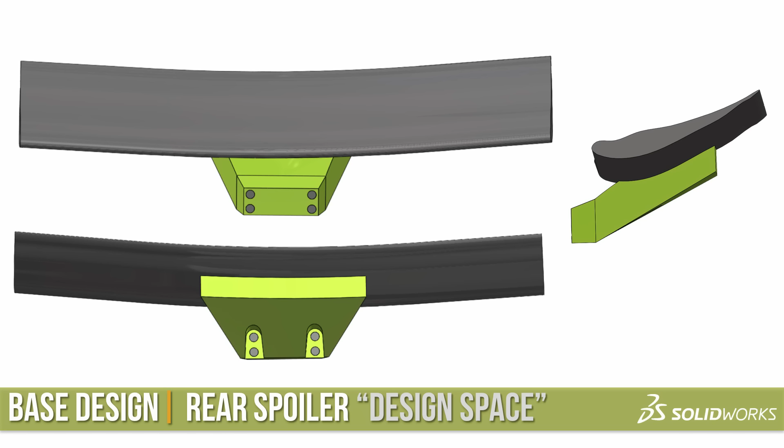All right, so what I was going to optimize for the spoiler was the mounting area. I brought this spoiler shape into my SOLIDWORKS assembly and oriented it where I wanted it relative to the rest of the car. I tilted it, placed it where I wanted it. And then I picked up the mounting points from that assembly. So in SOLIDWORKS, we call it an in-context feature. Then I opened up the part file and I drew this working envelope. That's what I loaded up into Inspire.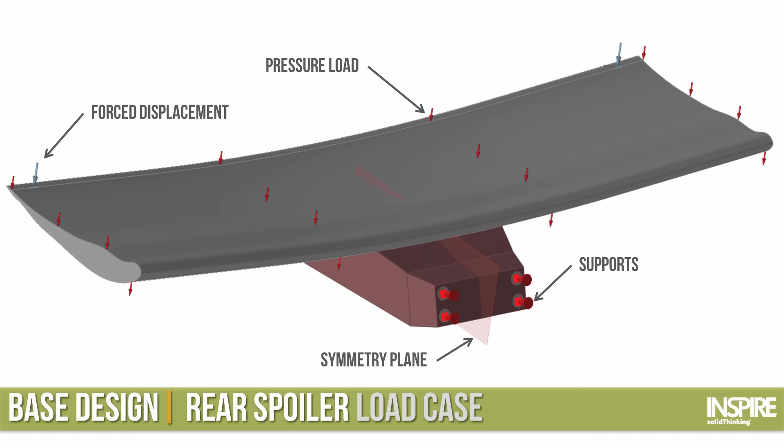The only thing that's different that we haven't seen on this is something called a forced displacement load. With a forced displacement load, I'm basically saying this bottom edge has to move a certain amount. This is actually a really cool load case, because if you think of something like a buckle or a snap fit, where you know it's going to deform a certain amount before it springs back into shape, you can just tell it that it has to move 1/10 of an inch. You don't have to figure out the loads that it would take to displace it that much. These are the results.

I looked at this and I thought, I can't really redraw that with the polyNURBS. I don't know how I would improve on that in SOLIDWORKS. So I just saved it as is. That's another option that you can do. You can just save that result as is. And when you look at that, actually I'll pass this spoiler around. You can see within the print those same bumpy surfaces. I just used it as is.

When it came time to print this, I printed it straight up, again, mostly for aesthetics reasons. I wanted surfaces that were going to be as vertical as possible. One change I made was to the support material. It needed support material all the way up to this mounting area. But the way these printers work, it can only print one material at a time. It prints 2 layers of the model, and then it does a relatively quick tip change over to support and does those 2 layers. That tip change happens every 2 layers, and it can take 15, 20 seconds.

And so when I first processed this, it was probably a 12 and a half hour build. By changing this material to model material and eliminating those tip changes, it went down to about an 8-hour build. So there's absolutely no difference, just a little bit of tweaking in the software. That's where knowing the ins and outs of this Insight software can help. The cost of the material is the same. No downside of doing that. And that's something that's exclusive to Insight, so you wouldn't get that in the Catalyst software.

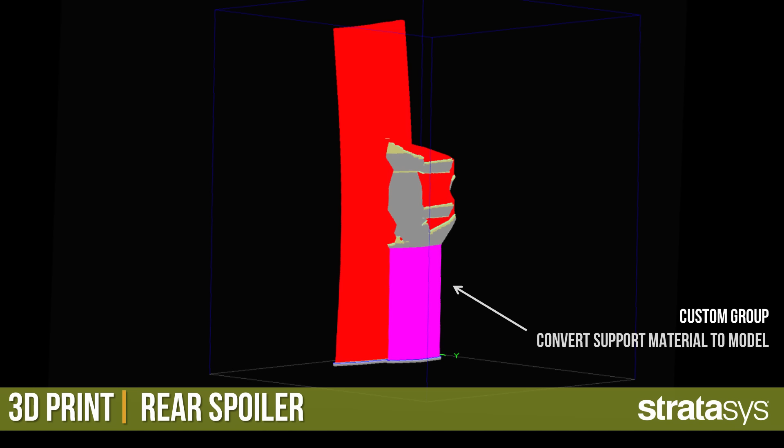All right, the last part that I looked at was the wheel. Look at that scan, just real quick. I just love that scan. The treads on that wheel are so crisp. I was really impressed with that scan. Same sort of thing. Design space, critical surfaces. I set it up in Inspire. A couple new things that we haven't used. We have the double draw shape control, so that's the dual draft.

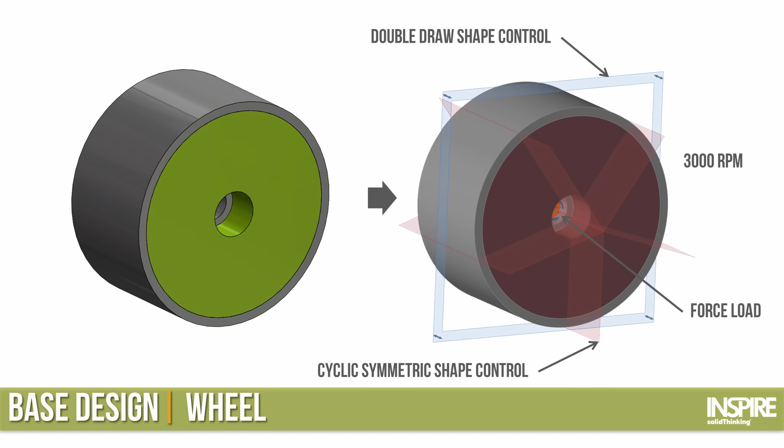I did an RPM load. I figured out, based on the diameter of this wheel and the advertised top speed of this guy, which is about 60 miles per hour, it came out to about 3,000 RPM. I just did a strict 3,000 RPM, but I could also do an acceleration up to 3,000 RPM as well. Force load for the spindle, and then also a cyclic symmetric shape control, basically meaning it's going to be symmetric around the center, and I could tell it how many legs I want. Here's the result.

I thought this was basically predictably boring, and I had already used a bunch of these, so I just didn't use it. I could have printed it as is, and it would have been a pretty good result, but I thought, man, that just doesn't really showcase what printing can do. And we hadn't talked about PolyJet yet, so I did an airless tire design. You guys, this might look familiar.

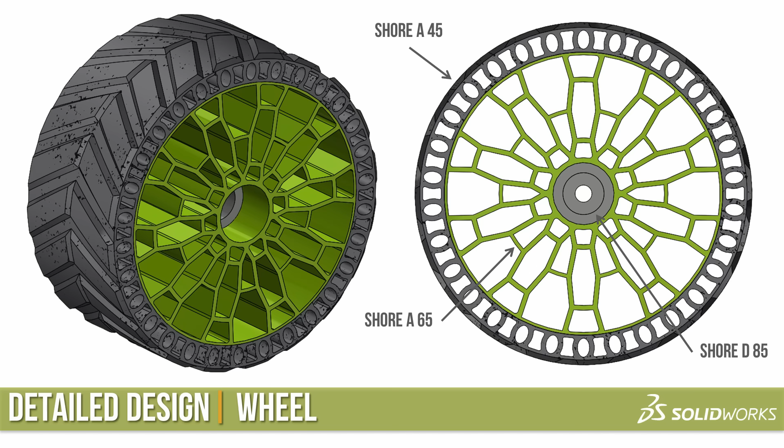But the cool thing about this is I knew I was going to print it on our Connex machine. And our Connex machine, instead of using that filament, it uses a resin with a print head. And the same way that your printer at home can print red next to green, this can print Shore 45 rubber next to Shore 65 rubber-like material next to, say, Shore 85, and it can do different colors and stuff like that. So I was able to create a wheel that is gradually stiffer as it goes down towards the interior. But that's all one print job.

How do you get the 3 different types of shore to bond with each other? That is the responsibility of Stratasys and their design. So, these are pretty similar materials. Actually, what you're seeing is 2 materials that are mixed at different ratios. They're laid down as a resin, and then they're hit with a UV light and cured, and they bond together. It has to do with the chemistry of the materials, so I don't have to deal with that. All I do is put it in the machine, and it does the magic.

PolyJet is a 3D printing method that makes beautiful, precise models in a huge variety of materials and colors. It works like an inkjet printer, but instead of jetting drops of ink, PolyJet 3D printers jet tiny droplets of liquid plastic. A UV light instantly cures the plastic, solidifying it. And so, layer by layer, complex models take shape. The most advanced PolyJet systems can build multi-material parts. Soft, rigid, clear, and colorful. You can even adjust material properties like heat resistance and durability.

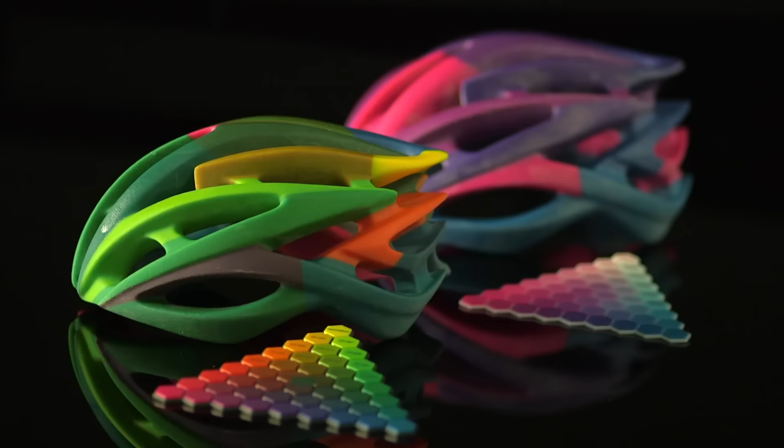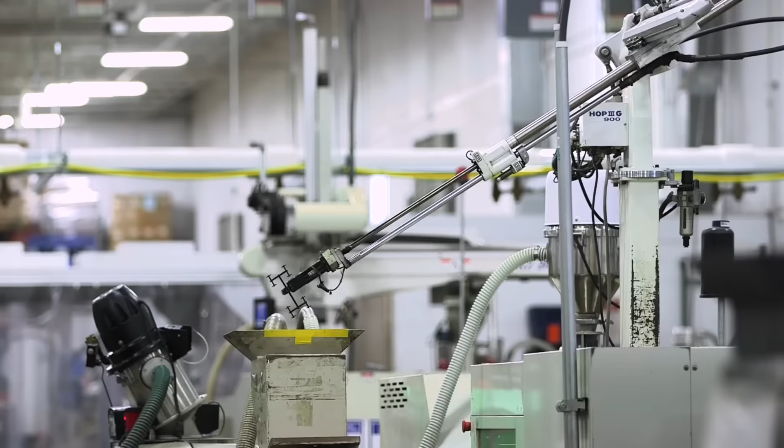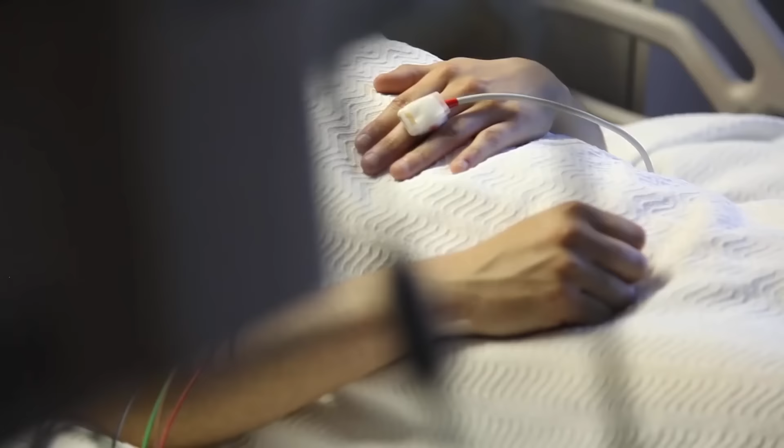The same technology that makes gorgeous prototypes also makes precise manufacturing tools. Designers can predict future needs and serve them now. Manufacturers deliver better products faster and with less waste. Researchers have new methods of saving lives. PolyJet is reshaping industries like film, fashion, and medicine. It's helping people with great ideas improve the future. What's next?

All right, so you guys will notice as you hold those parts that the surface finish is a lot better, the resolution is better, the size of the features is smaller than what we can do in FDM. The materials aren't quite as robust as FDM. We have lots of different machine options just like we do on FDM. Some of these machines, like the desktop series, will only print one material at a time. So the second parts that I just handed out came off a smaller machine. And then the wheels came off a Connex 3, which you can load 3 different materials, and it will let you print them side by side, or it'll also let you combine them, and that's how we get the different shore values.

We have a new machine called the J750. Anybody heard of that yet? It just got announced a couple weeks ago. I'm telling you, it's the coolest printer I've ever seen. It's like a Connex 6. So you can load up 6 materials, which means you can do clear next to full color, because you can load up to 5 or 6 different colors. It gets you over 360,000 colors.

It has different software too, so you can actually load in a color map or a texture or a VRML file. So if I wanted to print like a skid plate on the bottom of this guy, and I wanted to make it look like carbon fiber, or wood grain, I can go into Adobe, put that color information on that, and then the J750 will read it, and it will print out the full color. I don't have to do separate bodies and place the color. Even though it didn't have anything to do with this, I did want to show you guys a print from the J750. I can't wait till we get ours. I have so many plans. The color thing is huge.

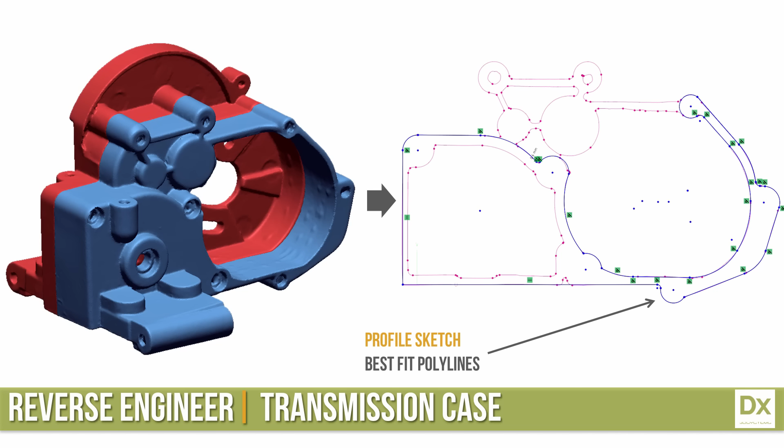I get the profile. I draw my own lines. It will do best fit lines when you want them, and it will also allow you to draw your own lines. So you're using it as a guide. It will snap to points and stuff like that. So the basic workflow looks something like this.

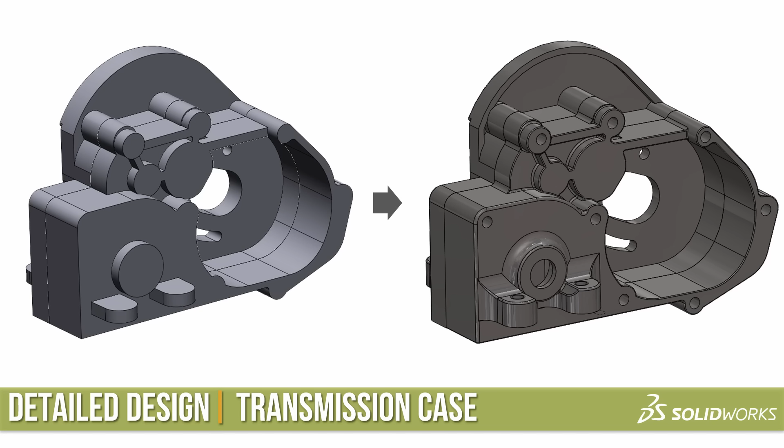You start using it as a guide to draw the basic shapes, and then you would take this basic shape, at least this is how I did it, and take it into SOLIDWORKS and do the more elaborate drawing. DesignX is a full CAD tool, so you could get this drawing inside DesignX, but I've just worked where my strengths are, so I brought it into SOLIDWORKS.

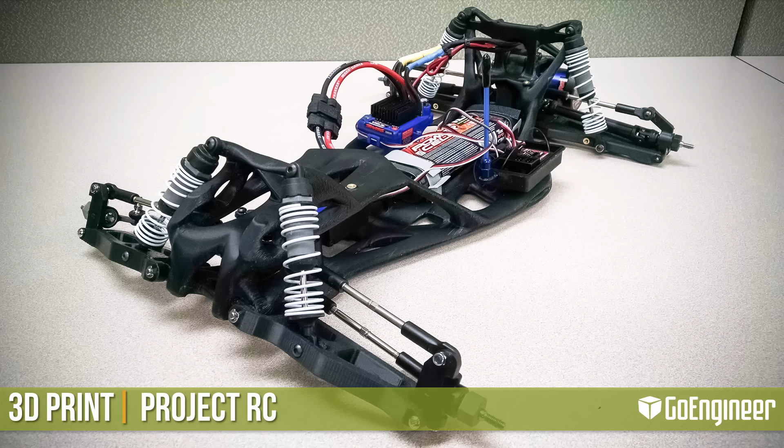We do have a couple of these prints there. You can see it's got bearings and whatnot. It's a totally functional prototype, even though it is PolyJet. And we're pretty much there. We've got the car up here, so if you want to actually see it, I do have the battery, and it has a little bit of power, so I might drive it around a little bit. It does drive.

It's not that impressive. I mean, the thing is impressive. If I drove it into the wall, it would destroy itself, I'm sure. I don't want to do that because I have to do this presentation in Portland tomorrow.

All right, so that's pretty much all I had for you guys. Go ahead. Did you have a question? Okay. Does anybody have a question at this point? That was a lot of content, wasn't it? What do you guys think of that workflow? What do you guys think of the individual tools that we used?

Any feedback? The Inspire software is good. It takes everything that Materialise will sell you individually and puts it into one package. Yeah, exactly. And Materialise is more geared towards 3D printing only, where this tool is not. And it's nice to see the options.